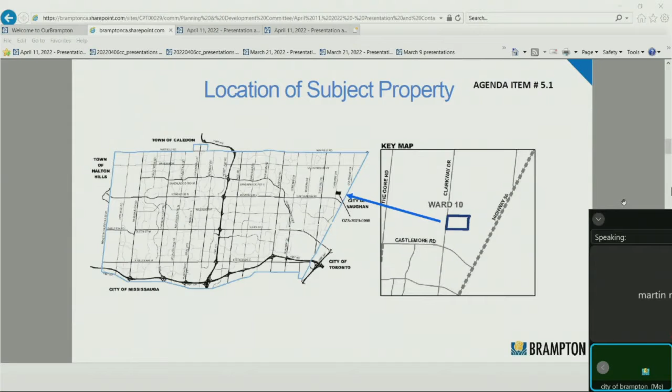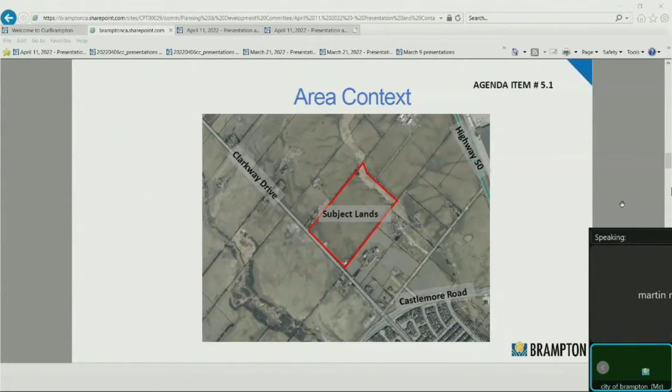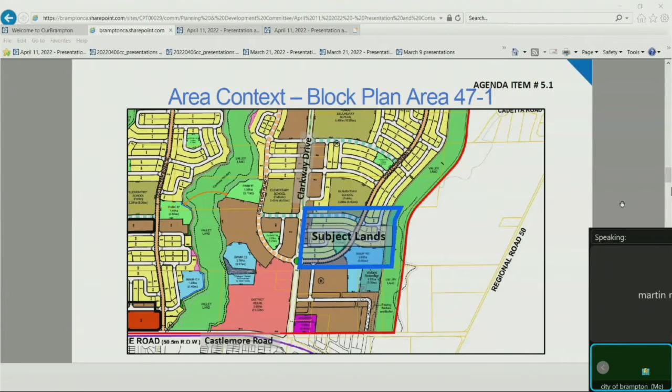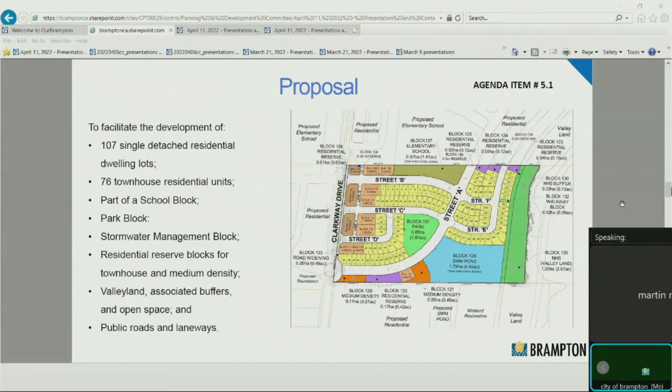Next slide. Here we have the proposal. The applicant is proposing a development with 107 single detached dwellings, 76 townhouse residential units. There's a school block, a park block, a stormwater management block. There's also a number of residential reserve blocks for townhouses in medium density areas, valley lands, associated buffers to those valley lands, open spaces, and public roads and laneways to service this whole area.

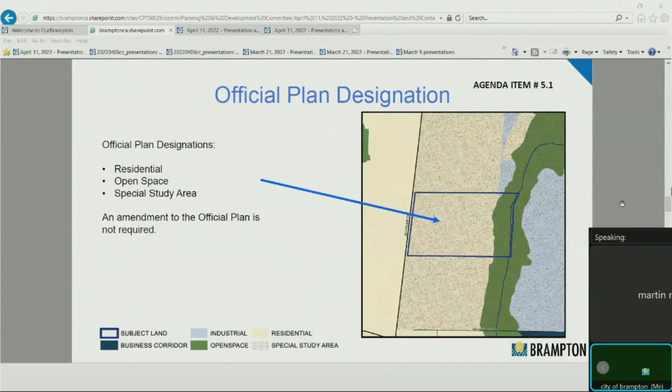Next slide, please. This slide shows the official plan designation, which is designated residential, open space, and special study area. An official plan amendment is not required for this application. Next slide, please. Here we have the secondary plan, Area 47. It designates this area for low, medium density residential, medium density residential, special policy area 9, neighborhood park, valley land, stormwater management pond. Again, an official plan amendment is not required for this.

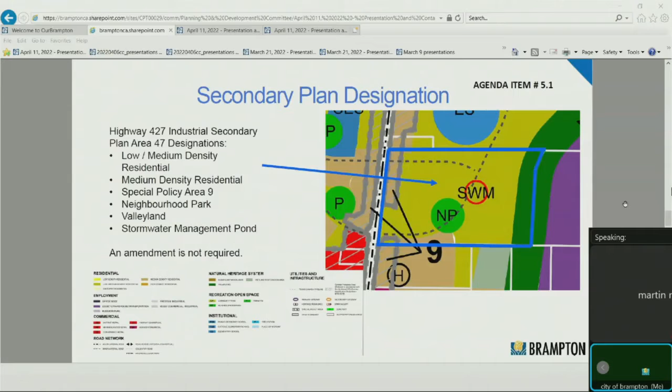Next slide. Here we have the block plan. It identifies this area for low, medium density residential, medium density residential, a park, valley land and a vista block, an elementary school, and stormwater management block.

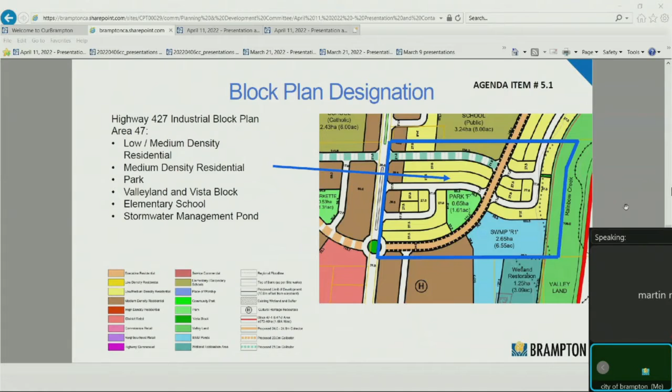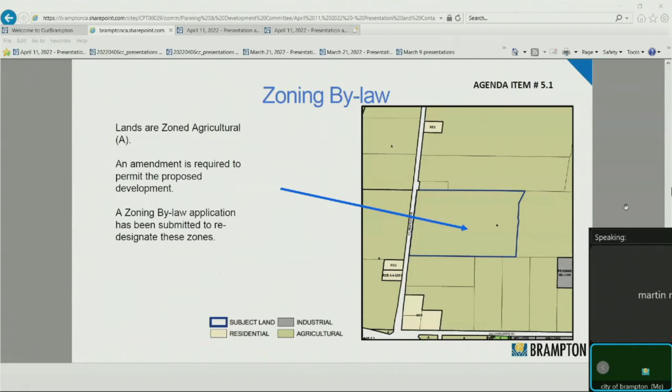Next slide. Here's the current zoning bylaw designation. It's identified as agricultural, which permits single detached dwellings as well as agricultural uses. A zoning bylaw application has been submitted in order to redesignate it to a number of different zones.

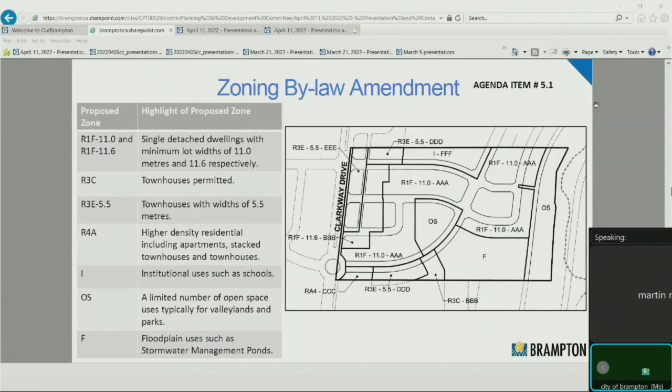Next slide. This application is going to be evaluated on a number of documents from our planning framework, including the provincial policy statement, growth plan for Greater Golden Horseshoe, Region of Peel Official Plan, City of Brampton Official Plan, and Highway 427 Secondary Plan, as well as the Block Plan. Staff will also ensure that the principles of the 2040 vision are being upheld.

Next slide. Staff are working on a few issues to be resolved with the applicant. Number one, that the applicant will provide some additional information about blocks 120 and 121, just to demonstrate how these blocks will be coordinated with the lands to the south.

Issue two, there's lanes A and B, just east of Clarkway Drive, running parallel to it. Those aren't permitted anymore due to servicing requirements. Number three, there's a potential for an increased density for the area highlighted in purple, just east of Clarkway Drive. Number four, a public road may need to be required in the area just south of Street A and west of the stormwater management pond there. Next slide.

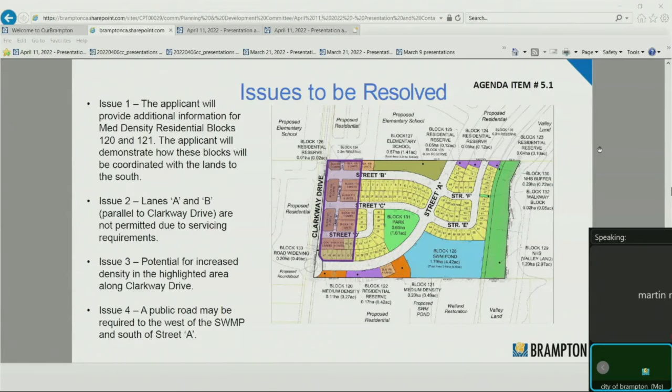Next steps: the notice of complete application was sent out on February 18th and circulated to all city departments and agencies, as well as external departments and agencies. The notice of public meeting went out on February 24th, and here we are today at the public meeting, in person and digitally. Staff will continue to review the applications and comments from both the public and technical reviewers. It will be advanced eventually to a report that goes to council for a decision, and issues raised will be addressed as part of the recommendation report. A letter will be sent to anybody who has provided information during this time or any other time before the recommendation report is written, and responses will be provided as part of that report.

The report associated with tonight's meeting will be available online, along with the presentation materials. The final report will be posted on the city's website in advance of the future meeting. My name is Stephen Dykstra, I'm the development planner for this file, and the applicant contact is Mark Condello, who works for GSAI — his information is posted as well. That's it, thank you very much. If you have any questions, I'd be happy to answer them.